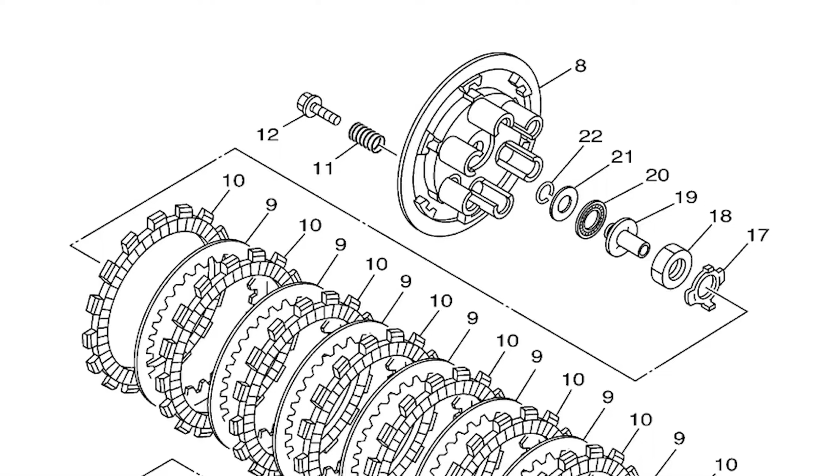Second, the springs and the screws that hold in the springs on the YZ250s and the YZ250Xs are different. YZ250X springs are a little bit lighter. I'm supposing because, well, it's a woods bike. You don't need that tension on the clutch pack like you would doing motocross, I suspect. So what I did was I ordered some YZ250X springs and the screws for my YZ.

So the other thing I picked up, hoping to get a little more leverage on this clutch, is a Pro Taper Profile clutch lever. You know, reading the reviews, people say, oh, my clutch pull is a lot easier. Well, we'll put it to the test. What I want to do is set up a test. I want to do a series of clutch pulls using a scale that I have to weigh luggage. Is it the most scientific? Probably not, but it's what I have.

We'll say 5, and then we'll take the mean average of those 5, and that'll be our baseline. Do some modifications here. We'll add the new springs, the new screws, and this new clutch perch. After we add all this stuff, I'll do 5 more pulls with the scale. We'll average those out, get the mean of the final, and then take a comparison. We want a percentage, right? I'm looking for, man, hopefully 20% better pull. 10% would be cool. 30 would be awesome. 2% would probably suck. That'd make me kind of sad.

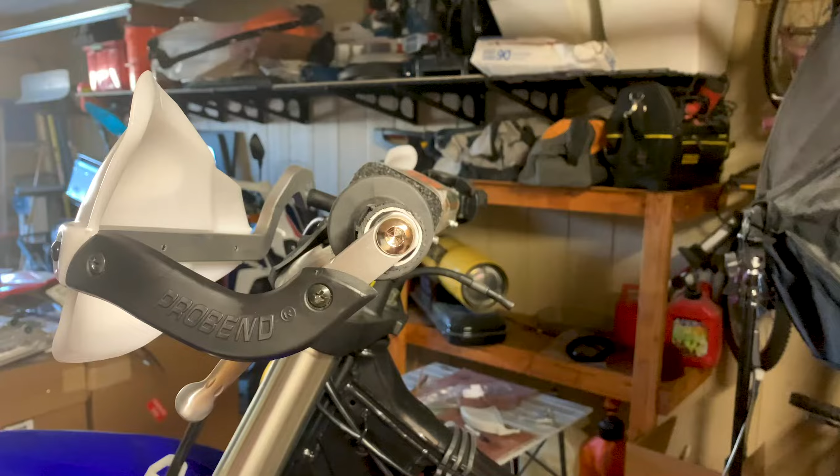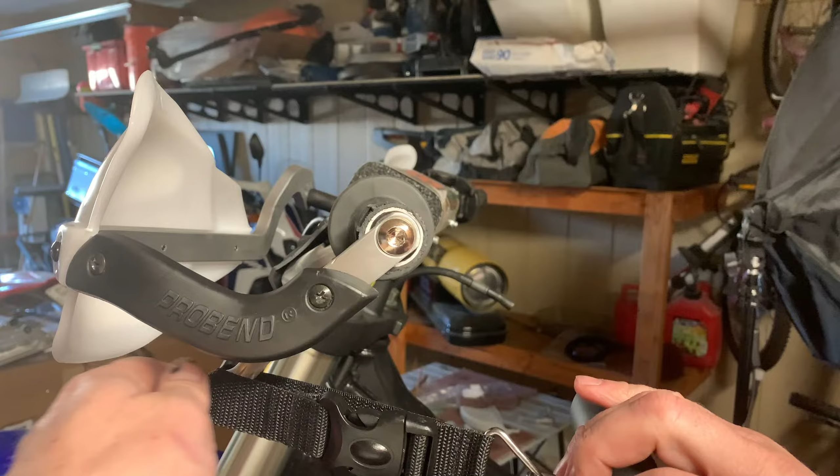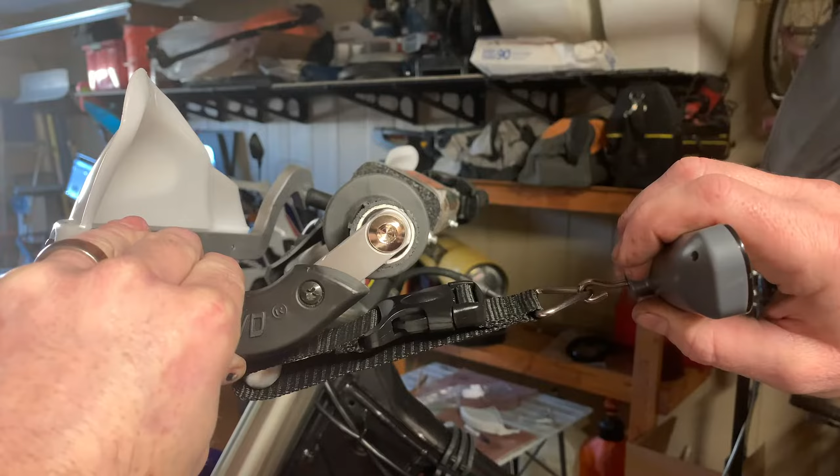Let's get on it. Here's the test, and this is about as scientific as I'm able to get at the moment. I'm hooking this onto the end of the clutch lever. I'm going to take 5 measurements. These are the before-modifications measurements. I'm just going to make sure that I attach it to the same place every time, that I pull this back to right about there before it starts touching the hand grip. Make sure that this isn't rubbing on anything. We're going to do this the same way each and every time. What we want is consistency so that we could come up with a percentage. Like, okay, it's 20% better. Does that make sense?

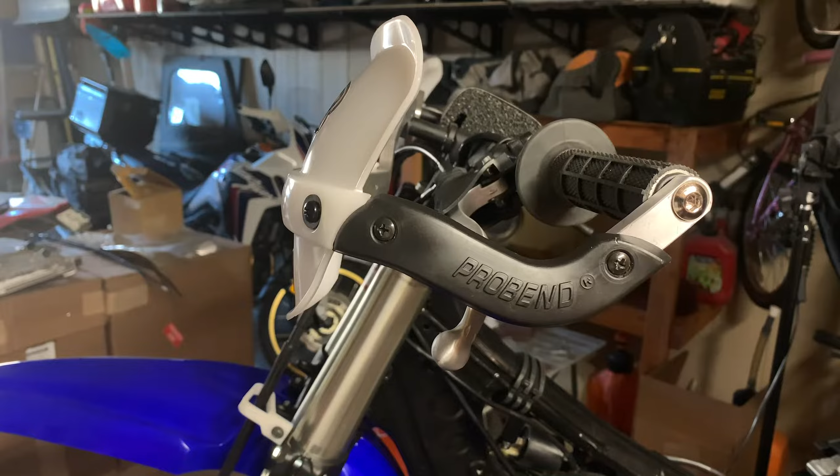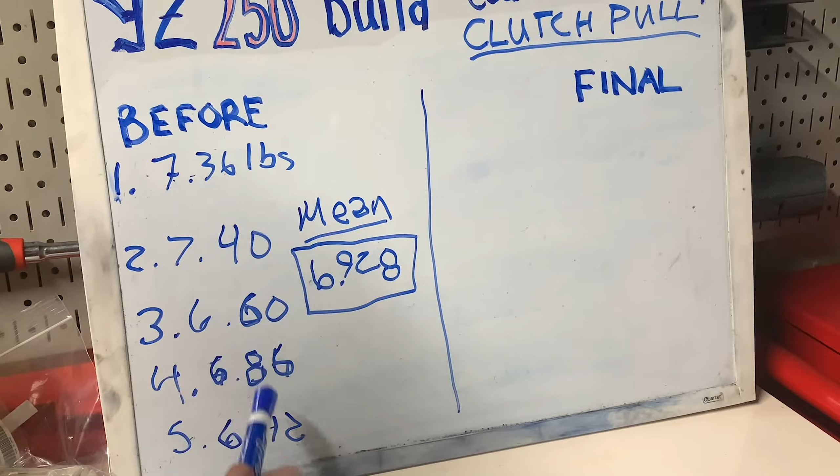Hello, Chinese luggage scale. 7.36. This one is going to be 7.40, 6.60, 6.86. This one's going to be 6.42 pounds. After some seriously complex math here, the mean average of these 5 pulls is going to be 6.928. This is our starting pull. It's not that bad. It's really not that bad. I'm beginning to think that I'm just a bitch. But let's see if we can do better.

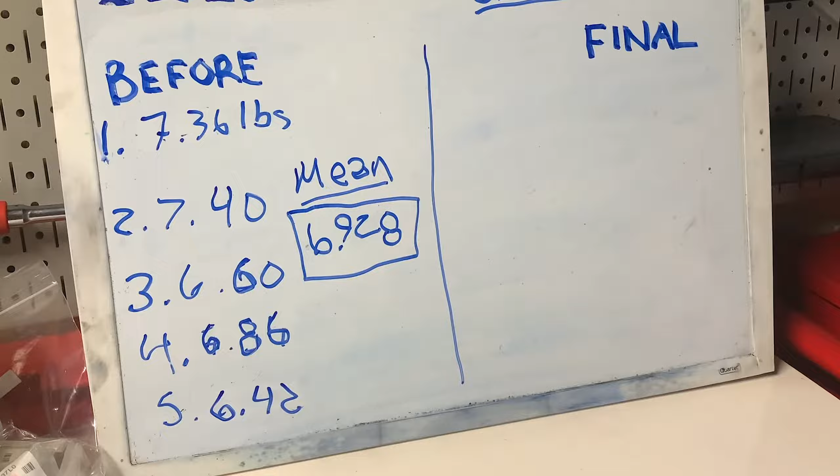I wish Yamaha wouldn't individually bag all these parts. All right, let's do this.

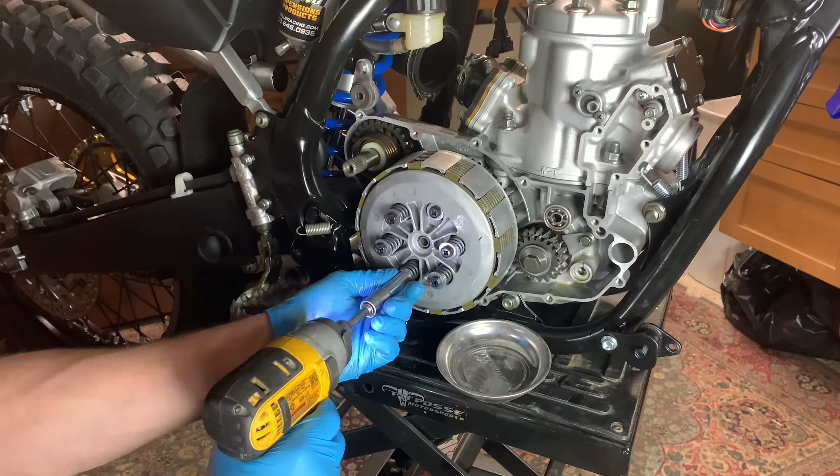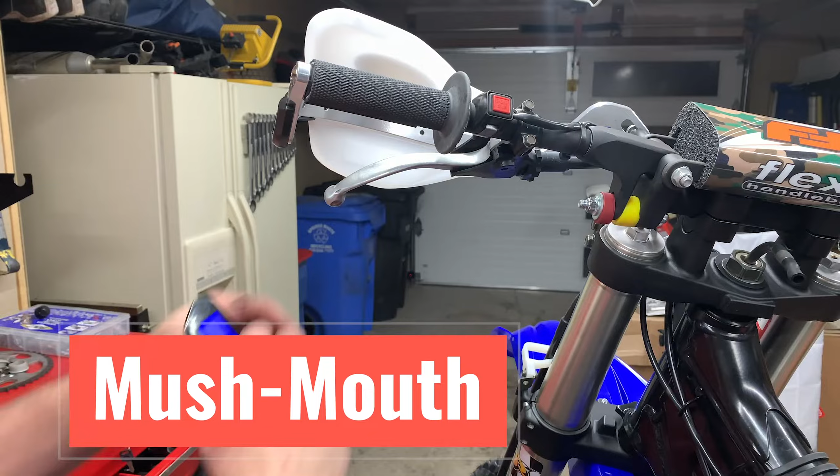These pulls are just with the new springs. 5.96, 6.26, 7.16, 5.52, that's not bad, and 5.96. Our before numbers, our mean of 6.9, almost 7 pounds of pull before we did anything. After I put the new YZ250X clutch springs and screws in, we went down to 6.1 as a mean, so it's not bad. 0.8 pounds.

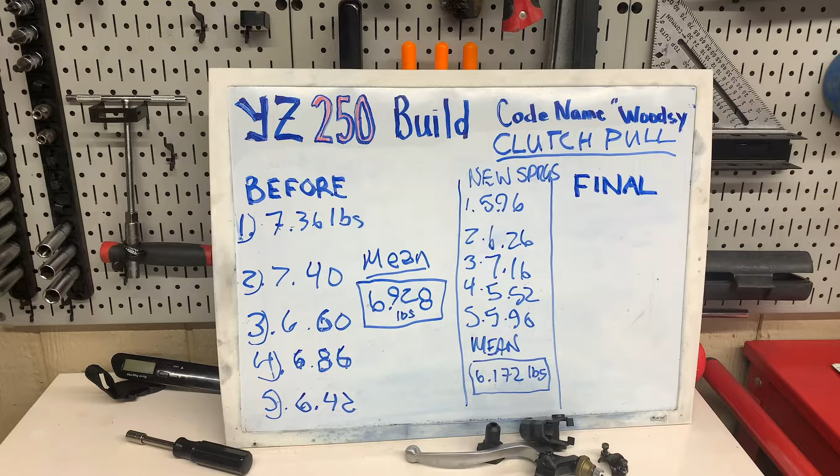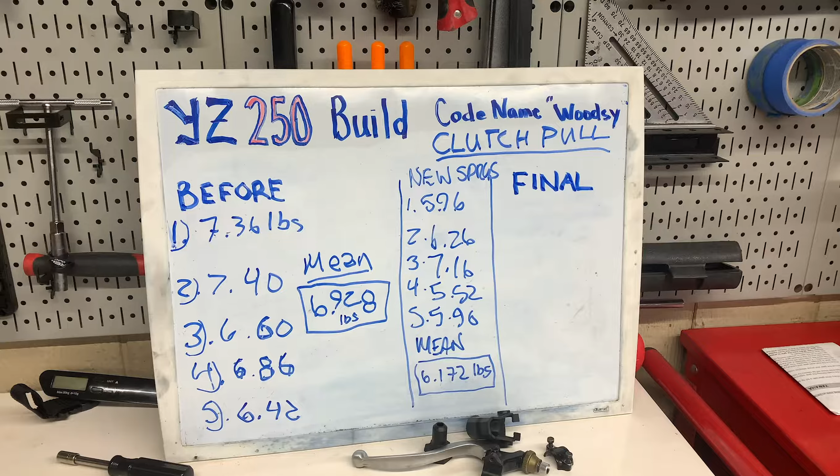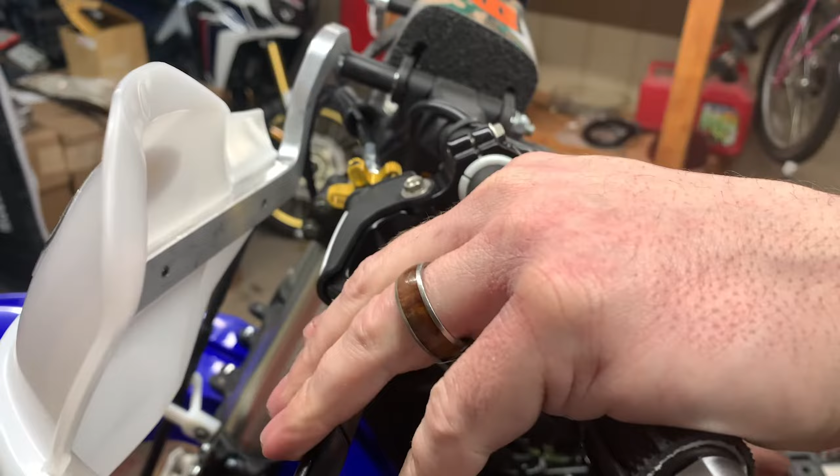We're gonna install our Pro Taper Profile clutch perch and lever. I already took it apart because that's part of the instructions. I'm gonna attach that real quick and we'll do 5 more pulls. We'll see what happens. I like this adjuster. Oh man, that feels good. Now that we have the clutch springs from the YZ250X as well as the Pro Taper Profile lever, we are going to do our last 5 pulls and see what kind of progress we made. See if it makes a difference.

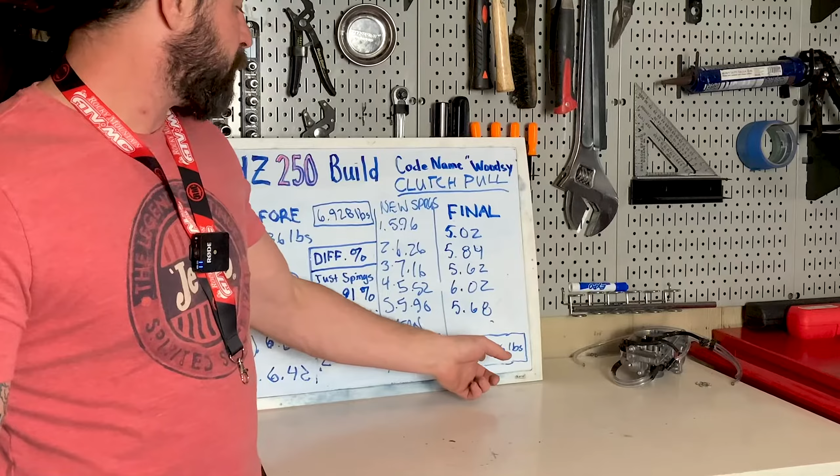Wow, that's going to be 5.02. That's going to be 5.84 pounds. 5.62 pounds. 6.02 pounds. That's a little higher than I'd like. Not bad. 5.68. Let's do some math. I feel, especially through physical touch, that the clutch is much easier. As a matter of fact, on our final pulls, we had a mean of 5.636 pounds. That's our average for our 5 pulls.

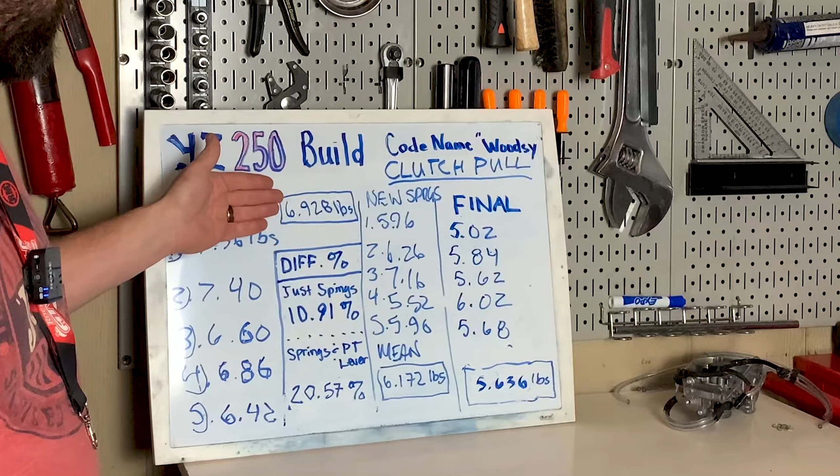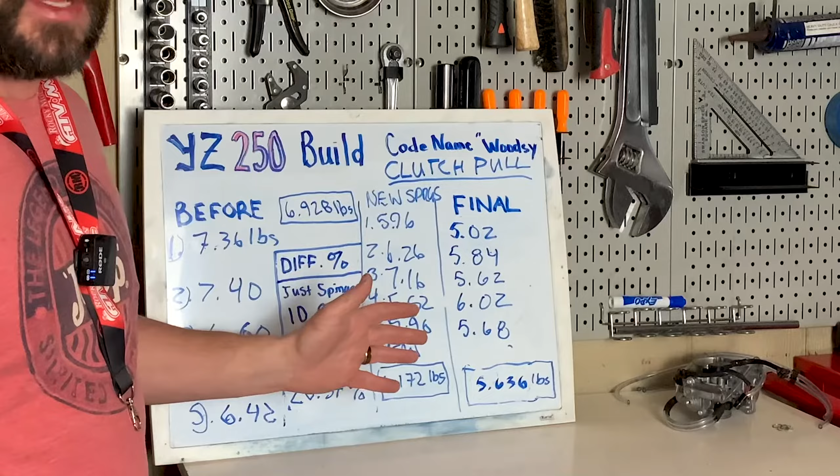And when we compare it against our original mean, which was 6.9, almost 7 pounds, we have a difference of 20.57%. So if you just wanted to do springs, you're looking at roughly 10.9, almost 11%. Again, individual results may vary, but with the springs and Pro Taper Profile lever, 20.57. I have a feeling if we did this again, it would bounce between 19 and 22 percent. You never get the same reading twice, but as long as they're close, I'm confident the numbers are close to being accurate.

I'm less concerned with how many pounds it actually is. What I'm more concerned with is the percentage difference from the beginning to the end. Almost 21%, that's not bad, especially over a full day of riding, a full day of enduro, whatever you're doing. That little bit of energy savings is gold. And you add that in with other energy saving techniques that you learn, and eventually you finish a race or get through the whole day without whining to your friends about how tired you are.

So that's basically going to wrap up our bro science for the day. And remember, bro science is infallible. You can't even argue against it because it's generally nonsense. Hopefully this gives you some options to ease that YZ250 clutch pull. I don't know how they are after the years 2002 and up. Again, this is a 2002. I can deal with this. This isn't bad at all.